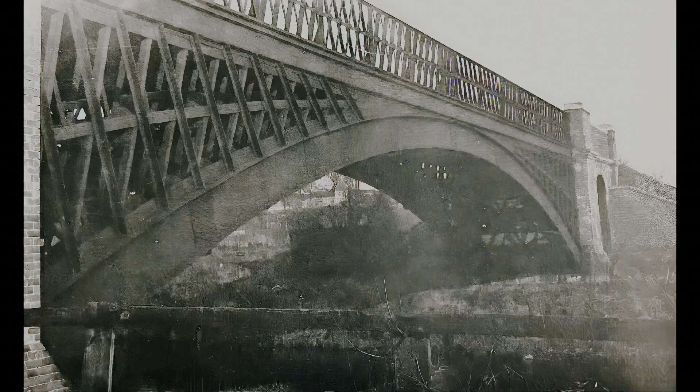This is the story of a Victorian railway bridge. I am standing on the old towpath by the River Wear at Durham City, looking across towards the cathedral and castle. Here, upstream of the city, is the racecourse on which the miners' gala big meeting has been held since Victorian times. And each June the regatta takes place along this stretch of river.

Walking further upstream, we round a bend and come across this sturdy brick structure. It is a ruined and overgrown abutment which once supported an iron railway bridge across the river. The matching abutment on the other bank is also still here, though its arch has collapsed.

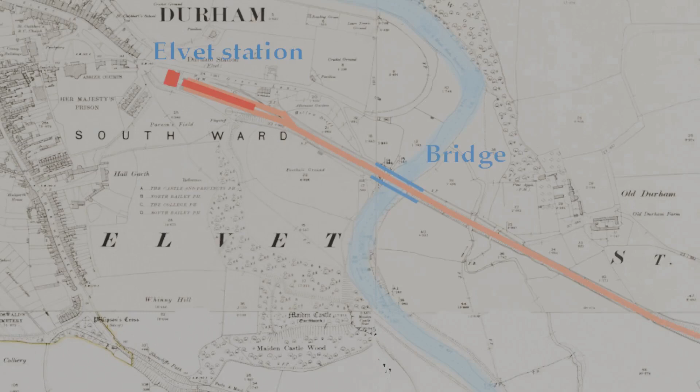The bridge was built in 1892 to carry the North Eastern Railway Company's line from Sunderland directly into Durham. This was a partial rerouting of the existing line, which passed through the colliery villages of Ryhope, Murton, Hetton, Pittington and Sherburn. The 1892 extension ended at a new railway station in the Elvet district of Durham, just behind the racecourse.

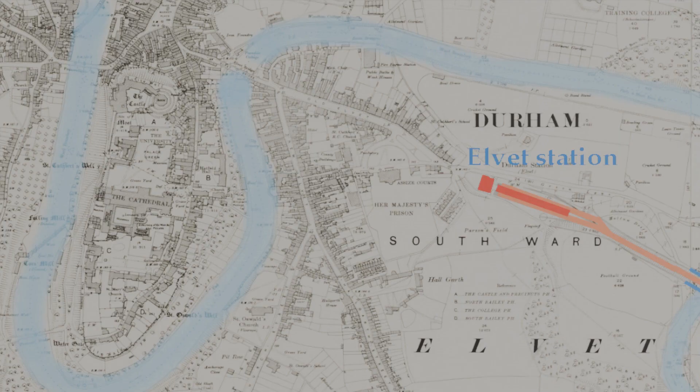The total cost of the line extension was over £30,000, of which about £4,500 was spent on the iron bridge, about £500,000 in today's money. Elvet Station opened in 1893. However, the venture was not a commercial success. It closed to passengers as early as 1931 and to freight in 1954.

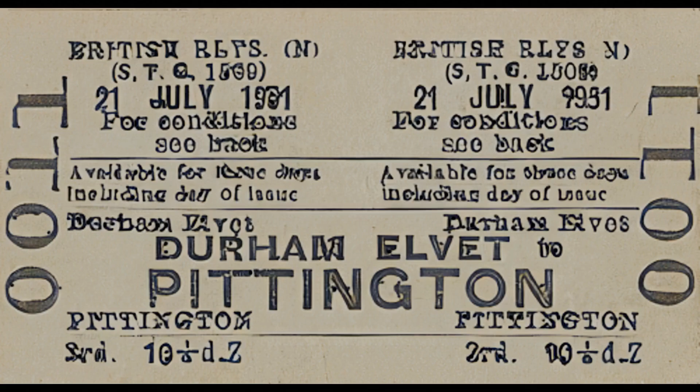The exception was once every July when special excursion trains brought miners and their families to the big meeting on the racecourse. The bridge was demolished in 1963. From my school at the top of Whinny Hill, I watched the flames of the oxyacetylene cutters as men took down the ironwork.

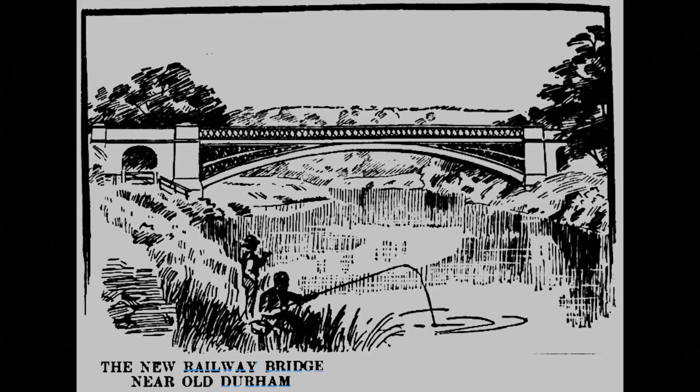In this video, we will use computer graphics to show how this impressive bridge may have been constructed and what it looked like. We are most grateful to the North Eastern Railway Association for finding in their archive the original engineering drawings. The designer was Charles Harrison.

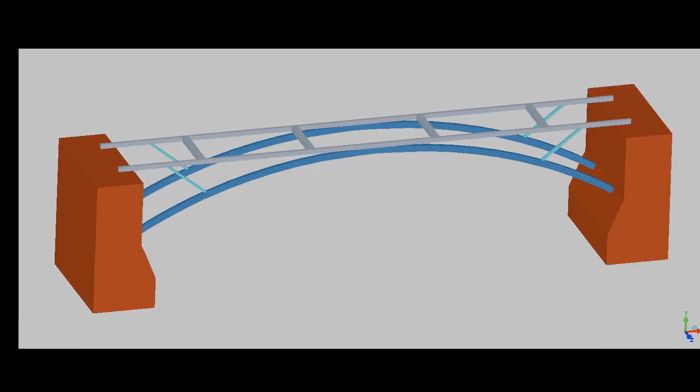The concept is simple. The railway tracks ran on a deck supported by two girders between the top of the abutments and supported below by arched girders which butt against the brickwork at a lower level. Criss-cross spars stabilise and stiffen the structure. The span was 130 feet, about 40 metres.

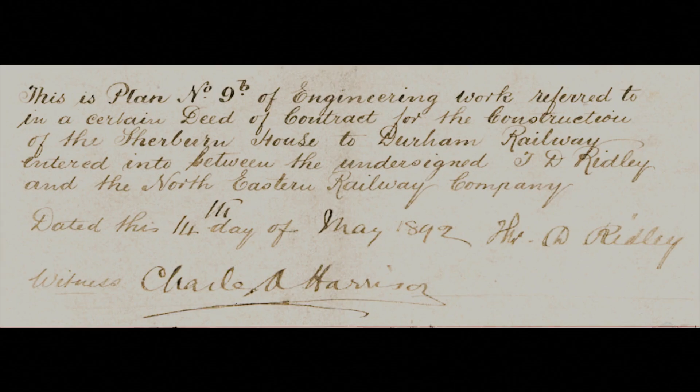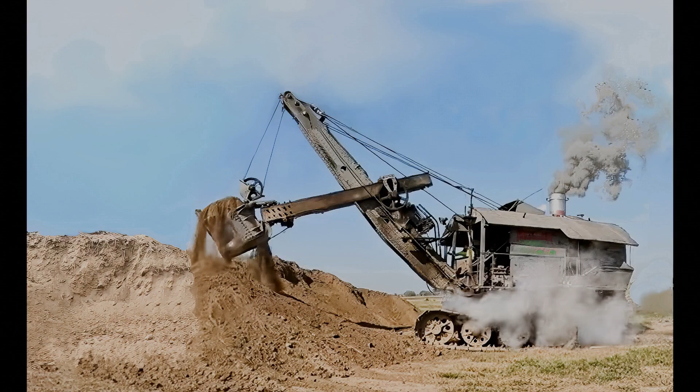We can only speculate how the bridge and station were built. It seems likely that the embankment from Sherburn House was first, so that the workmen, building materials, iron sections and steam-driven machinery could be brought in from Middlesbrough, Stockton and Sunderland.

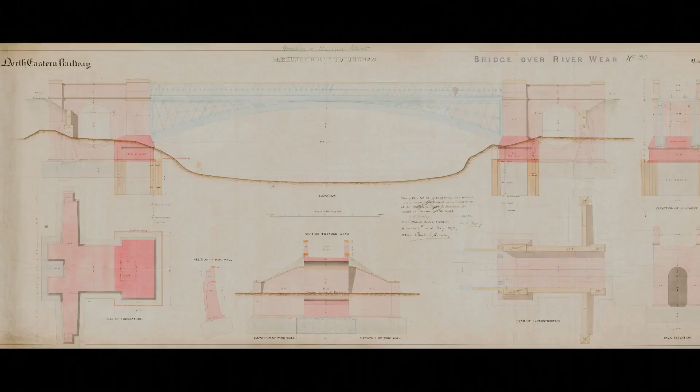Other bricks, lime, scaffolding and wooden planks may have been hauled by horse and cart, or floated upriver on a barge towed by horses. Construction was by hard manual labour. Thomas Ridley had 300 men working on the project. In the computer graphics which follow, we give some impression of how work may have proceeded week by week.

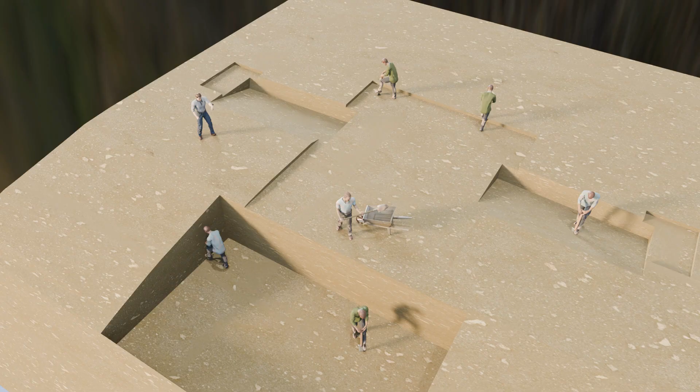Therefore, in the spirit of a model railway, here is the section of riverbank on the east side. The river level is about 10 feet below the road. That's about 3 metres. After the land had been surveyed and the vegetation cleared away, the men started digging. They may have been helped by steam-powered mechanical diggers. The soil and stones were probably moved to build up the embankment.

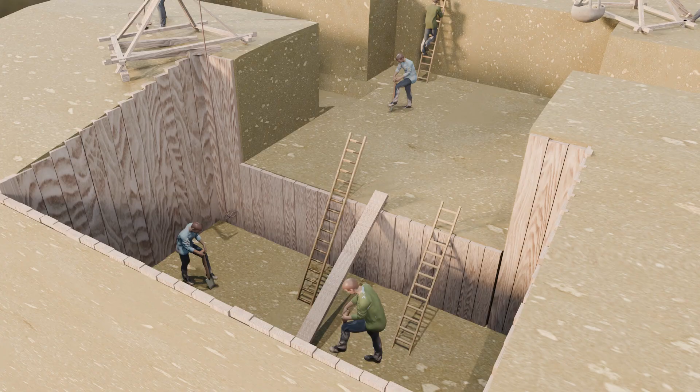A support of wooden cribbing was erected around the walls of the deepest hole beside the river. Water seeped continuously into this muddy pit, since its bottom is lower than the river bed. So while some men were digging, and others hauling the spoil to the surface, yet others were pumping out the water or bailing it in buckets.

The foundations, like the whole abutment, are in 3 parts. First, a 12 feet deep block of concrete under the massive riverside tower, which supports the ironwork. Second, there are 6 feet deep blocks under the road arch. And third are inclined blocks of concrete under each of the wing walls. In this cutaway we can see these concrete foundations.

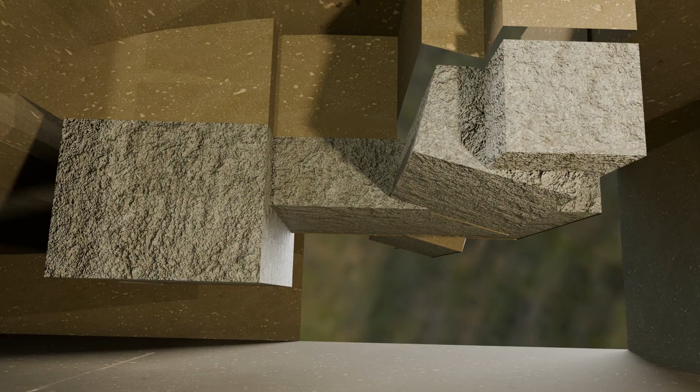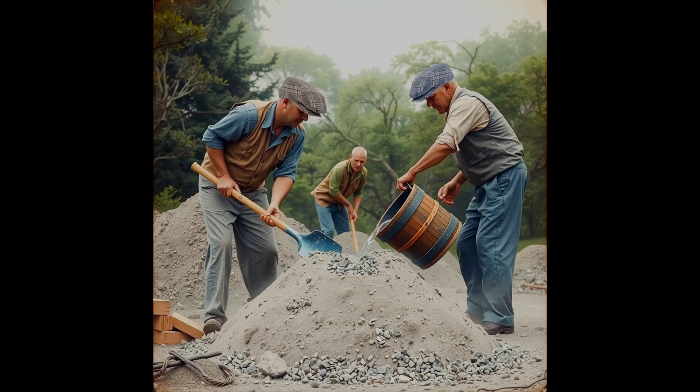Concrete is an aggregate of sand and gravel, bonded by a cement powder which sets hard when water is added to the mix. There had long been a need for water-resistant cements, and Portland cement had been invented in 1824 to meet this need. It sets by chemical reaction with the water and becomes hard in a day or so. By 1890, concrete made with such a quick-setting, water-resistant cement was the material of choice for foundations, particularly on a riverbank.

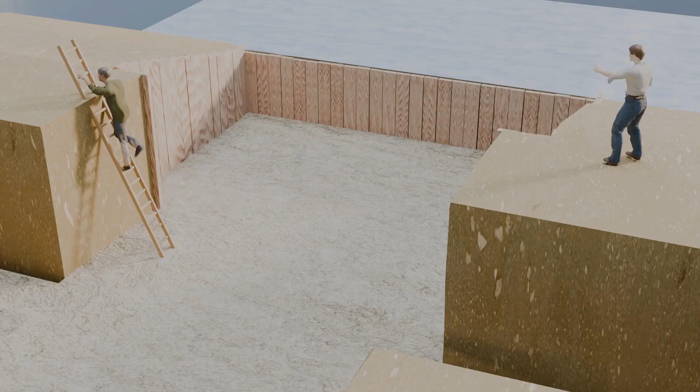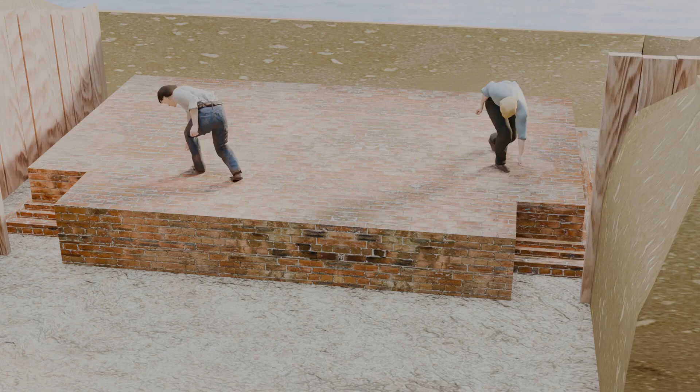Once the concrete had set, a massive block of bricks in cement was built on top of this deepest concrete block. It is 12 feet wide and 22 feet long. The drawing specifies bricks in cement to be used here. This means that the mortar should contain Portland or similar cement to make it water resistant should the river level rise high.

The wooden cribbing was sawn off and the excavations widened to allow the bricklayers more room to work. The men also laid a terraced brick base around the other concrete foundations. The positions where the arched iron girders press against the brick abutments is called the springing. The end of each girder fitted into a cast iron plate which was bolted to a massive granite block cut at an angle of 23 degrees. These blocks were set into a solid pyramid of bricks in cement.

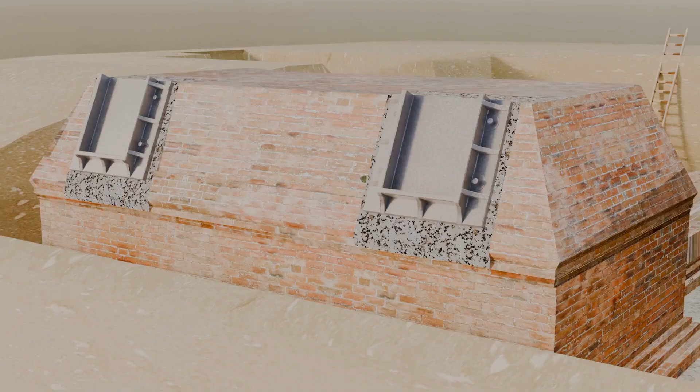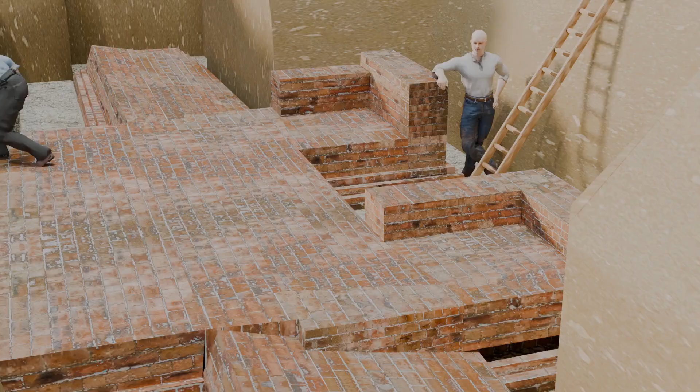Today, when the river level is low, you can still see the concrete foundations supporting the granite block, and its tapered pyramid above. One iron plate is also still in place. The higher brickwork in the riverside tower and elsewhere would have been constructed in the traditional way with interlocking courses of bricks in a lime mortar. This mortar would have been mixed in troughs on site by pouring water onto quicklime. It hardens very slowly through chemical reaction with carbon dioxide in the air.

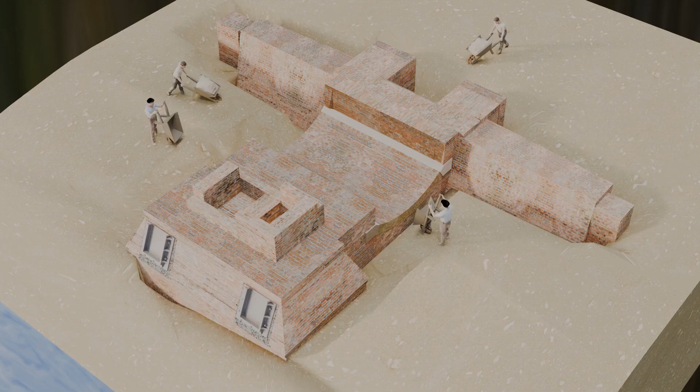Under the roadway they built an inverted brick arch, mirroring the arch over the tunnel. This would prevent the walls of the tunnel from creeping inwards under the weight of the trains. The wing walls, which held back the embankment, were 6 feet thick at their base. They were tapered in height and along their length, and each had a pillar at the end. Nothing of these pillars can be seen today. Once the brickwork was above road level, the trench was filled in.

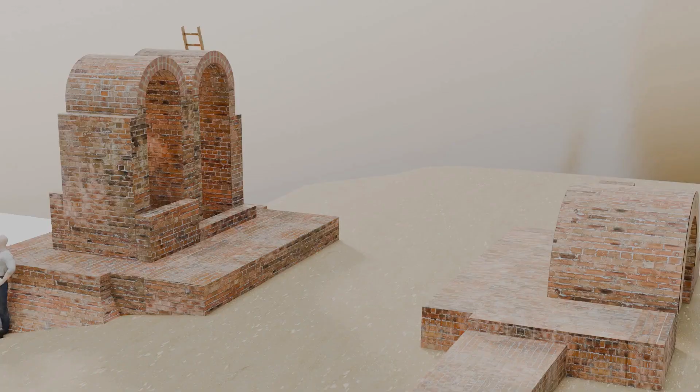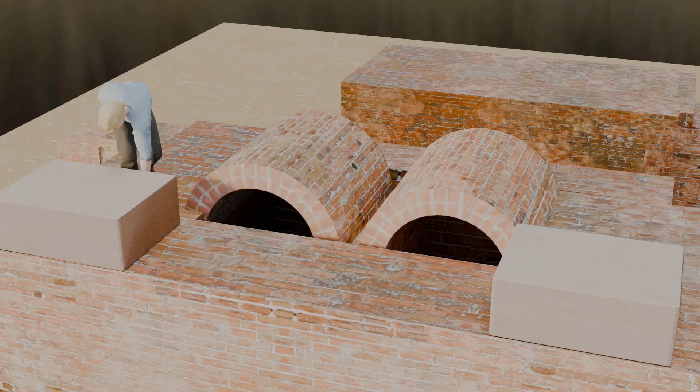There are hidden internal structures. There are 2 arched chambers inside the main tower and a single arch next to the embankment. These would be strong enough to support the moving loads above. Apart from the internal arched chambers, the whole abutment appears to be solid brickwork. There is no indication of rubble infill between walls, which had long been a common practice. Towards the top of the main tower, 2 large padstones were placed directly above the granite blocks to bear the girders of the bridge deck.

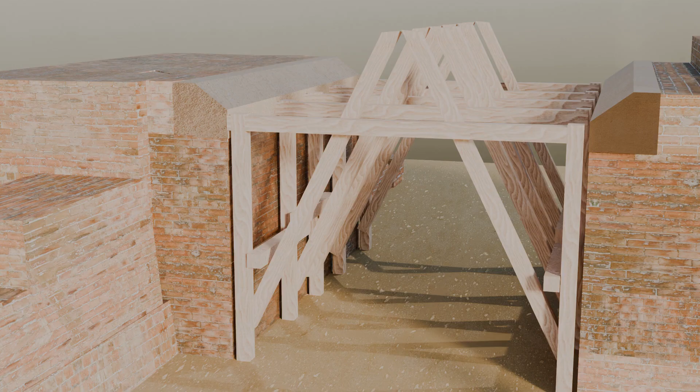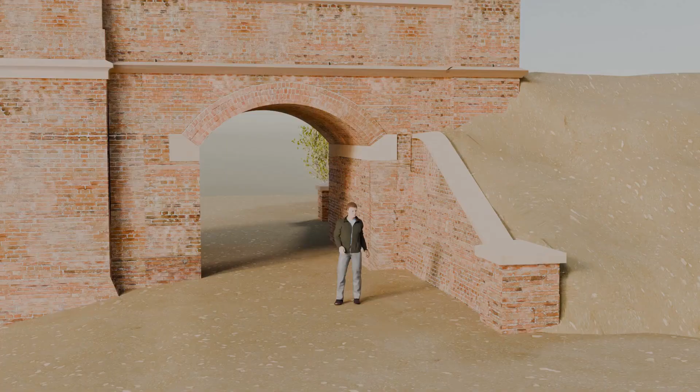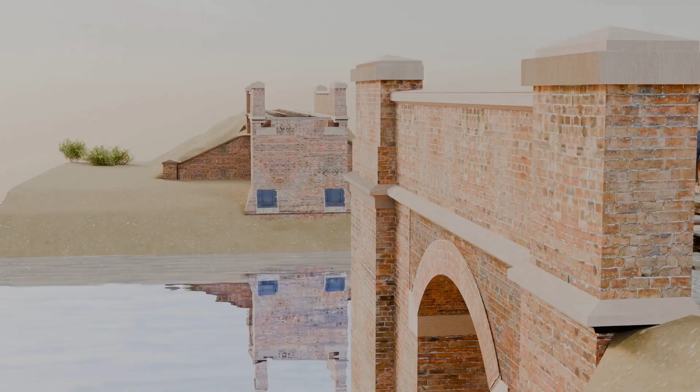A curved wooden former would have been used as temporary support while the bricklayers built the arch. The tunnel is 17 feet long, 12 feet wide and 12 feet above the roadway. The architect made the abutment pleasing to the eye by adding a stone cornice. Similar stones capped the wing walls. On top are the parapets, though they were not completed until the upper girders were in place. The rails on wooden sleepers ran centrally between them. The west abutment and the 2 embankments would have been finished at about the same time. If we imagine all the soil removed, the full size of the abutment is plain.

While the abutments and embankments were being completed, the iron girders were being forged in Stockton and preparations made on the river to erect them. The total weight of the iron was reported as 130 tons. However, there was a limit of perhaps 10 tons to the single weight which could be raised into place, so the largest girders were fabricated in sections and joined together on site. The bridge was made of wrought iron plates and angles fastened by rivets. This contrasts with the welded steel structures of today.

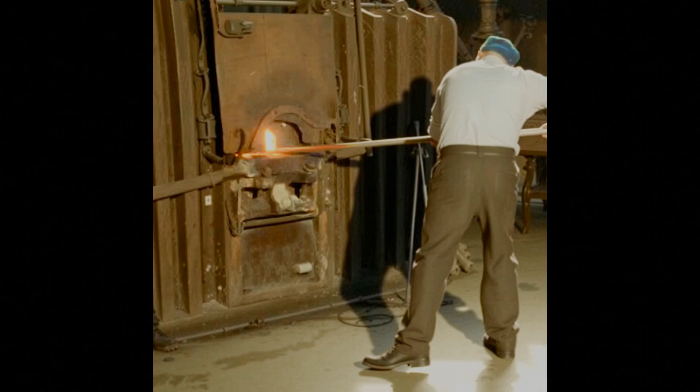Wrought iron was traditionally made from impure pig iron in a dish-shaped hearth furnace heated from above by hot gases from burning coal. The molten iron was stirred with long iron rods by burly sweating men. Added oxides and hot gases from the coal combined chemically with impurities in the iron to form a slag, so refining the iron. Most slag floated to the top and was skimmed off, but many small particles remained trapped within the melt. The iron was ready when it stuck together in pasty lumps.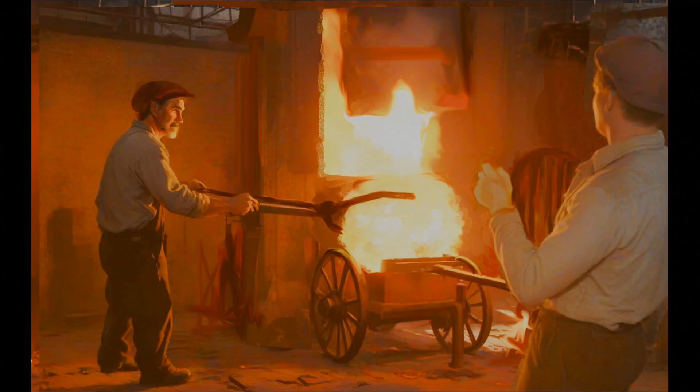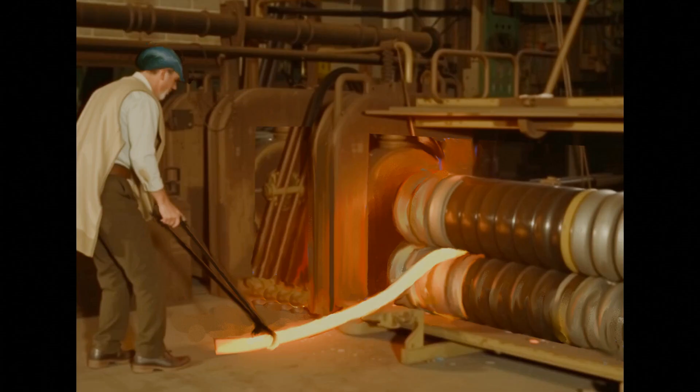When lifted from the furnace, each orange hot lump was forged into a crude block using steam-powered hammers, which squeezed out more of the slag. Several blocks were then forged together and squeezed again. Rivets and other small items were made by forging them to shape, whilst plates, bars, angled sections and rails were made in a rolling mill. The repeated forging and rolling elongated the entrapped slag particles to give the iron a fibrous texture resembling wood.

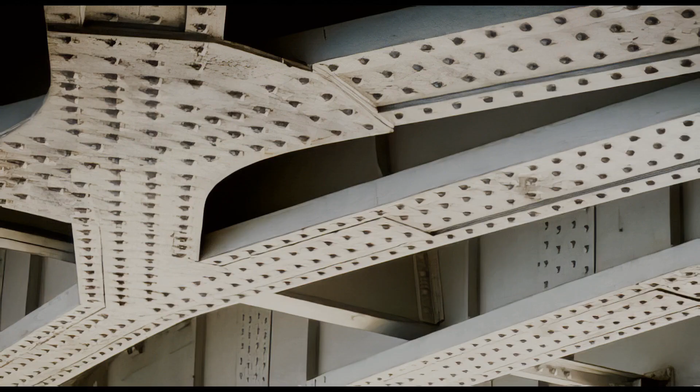Riveting was used to make iron ships as well as steam boilers and bridge girders. It was a way of stitching two flat iron sections together. Matching holes were drilled in each section. The flat sections were then overlapped and temporarily secured in position with nuts and bolts.

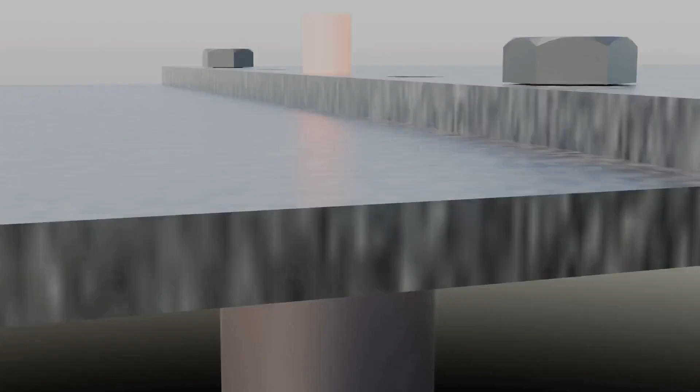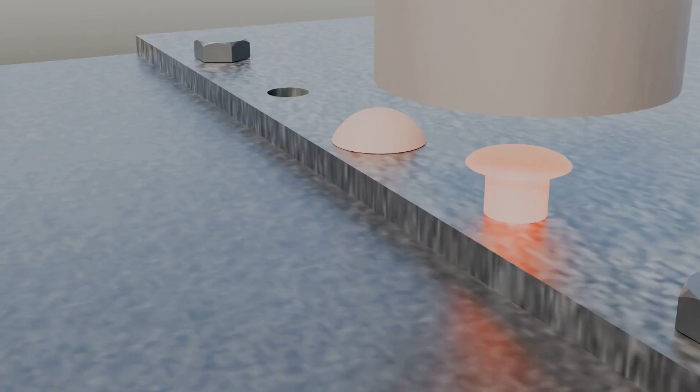A red-hot rivet was taken from the furnace and quickly pushed through one pair of aligned holes. A tool with a dish-shaped recess was used to hold the mushroom head firmly against the plate, whilst a similar tool hammered the protruding rod, deforming the softened iron into a second mushroom head. As the rivet cooled, it contracted and pulled the plates tightly together.

In the factory, rivets could be fitted quickly by one operator using a hydraulic press, but on site 2 men were needed, one to hold the rivet head, while his workmate hammered the protruding shank.

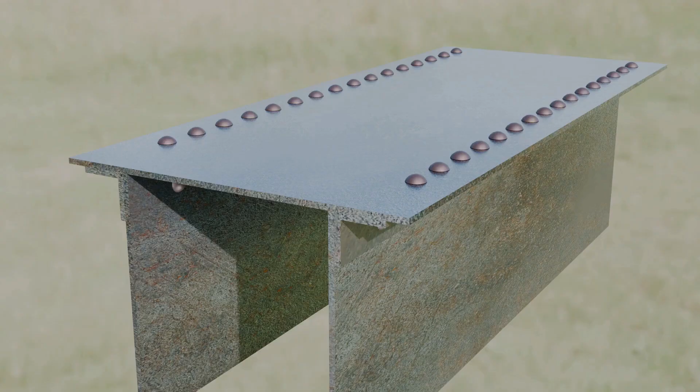Most of the bridge was made by riveting 1/2-inch thick plate and 4-inch L-shaped angle sections together. The largest girders were box-like and hollow to allow access to both ends of each rivet. Plates and sub-assemblies were joined by butting them together and adding 1 or 2 cover plates.

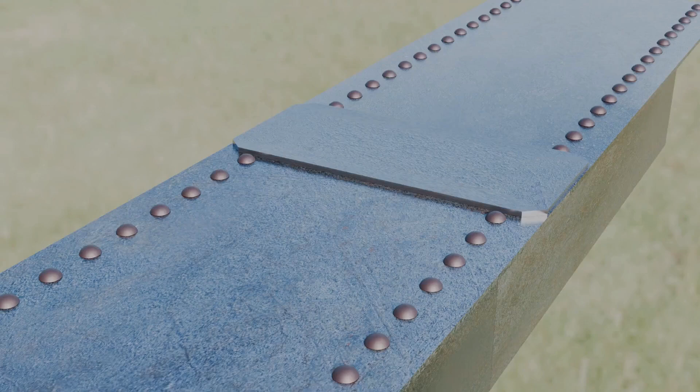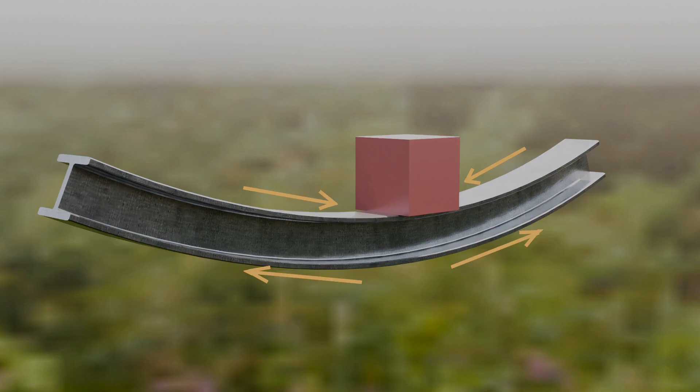A weight-bearing beam typically has 2 horizontal flanges joined by a vertical web. The beam gains its stiffness from the fact that, as it bends under the load, the top flange must contract, while the lower one must expand. The wider the separation of the flanges, the larger the effect. In fact, doubling the web height produces an 8-fold increase in stiffness.

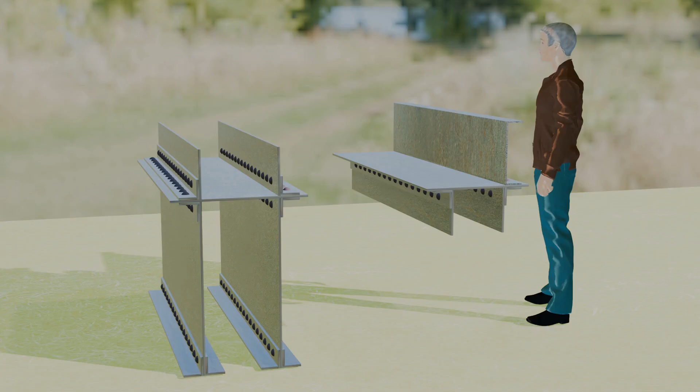These pictures illustrate the designs of the large arched girders and the smaller straight deck girders. The arched girder, called a rib, is 28 inches wide and its lower section is 36 inches high. On top are extra inner and outer webs to which the criss-cross bracing is fastened. Similarly, the deck girder has a single 14-inch high channel beam added on its outer side.

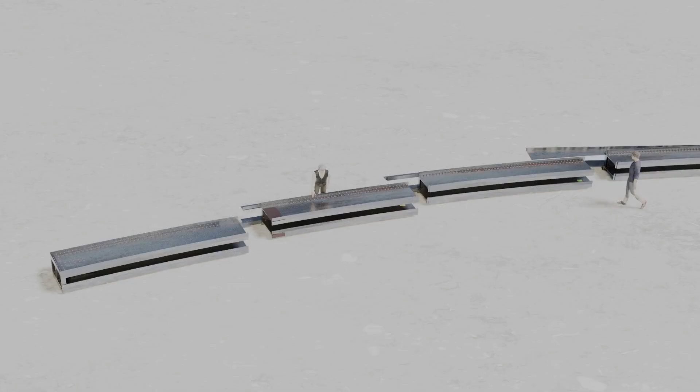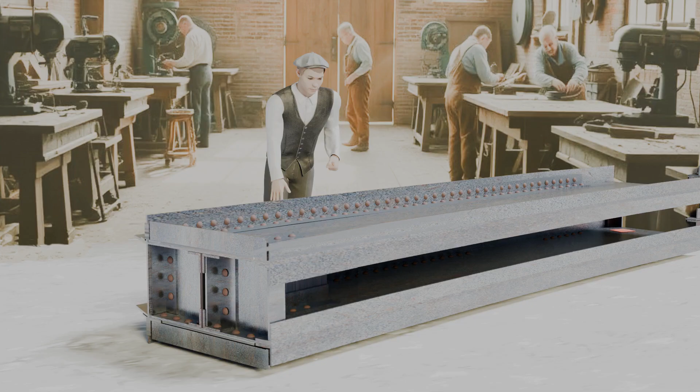Here are full sections of a rib lying on the factory floor awaiting transport to site. Note how the upper webs are offset with respect to the main body of each section. Each section was 16 feet long and weighed 2 1/4 tons. We have not shown the many holes drilled for more rivets to be added on site. The girder ends are reinforced, especially the end which presses against the iron plate on the abutment.

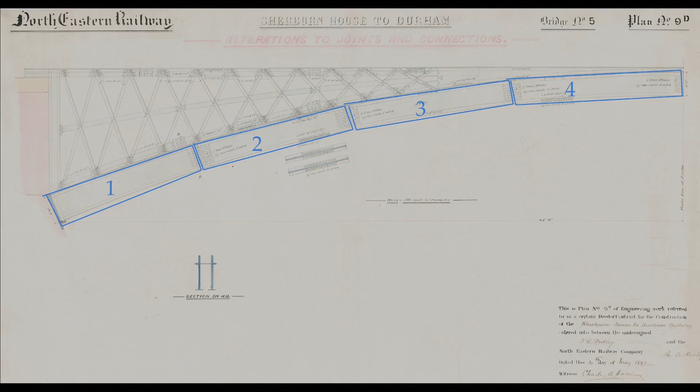The two deck girders just rested on the abutments. They were not solidly built in. Similarly, the arched girders simply rested on the iron end plates, angled at 23 degrees. These flexible joints allowed the girders to expand and contract as the temperature changed from summer to winter. However, it also meant that each girder section had to be individually supported until all of its sections had been fixed together. Only then would the whole girder become self-supporting.

The site engineer was Mr. William Mead King. By careful logistical planning, he and his colleagues determined the best order in which to bring the sections to site and how to erect them into place. We will now conjecture one way in which this could have been done.

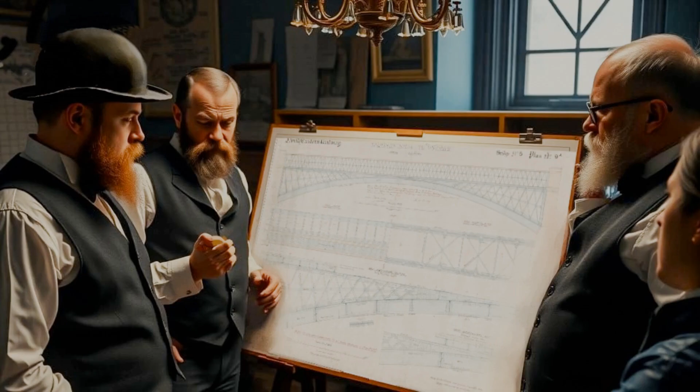We do know that a wooden bridge had been built across the river in the summer of 1892, because newspapers reported that it was bodily swept away by floods that October. So a replacement wooden platform had to be built on stout trestles driven into the riverbed. This would have been started while the bricklayers were still building the abutments.

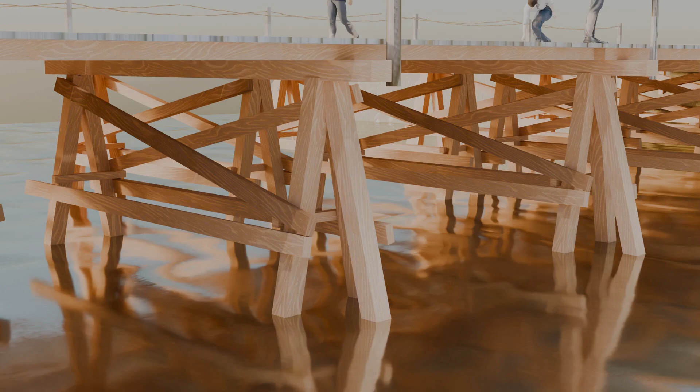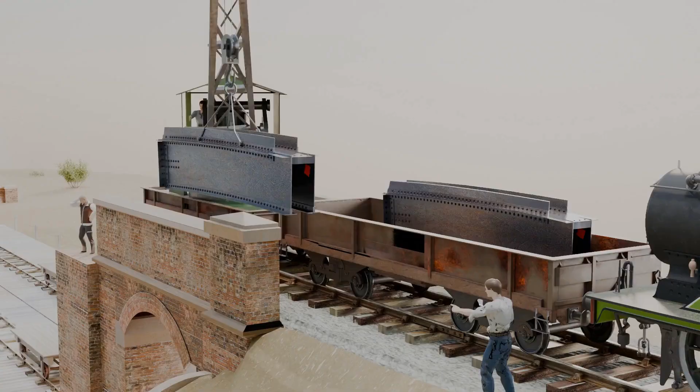We suppose that Thomas Ridley's men used a steam-powered crane mounted on a railway truck. This could lift the iron sections from a wagon onto the wooden platform. We further suppose that no similar crane could be brought to the Elvet side, but instead a steam traction engine pulled the ropes and cables. Flat trolleys on narrow rails could then carry the sections across the river.

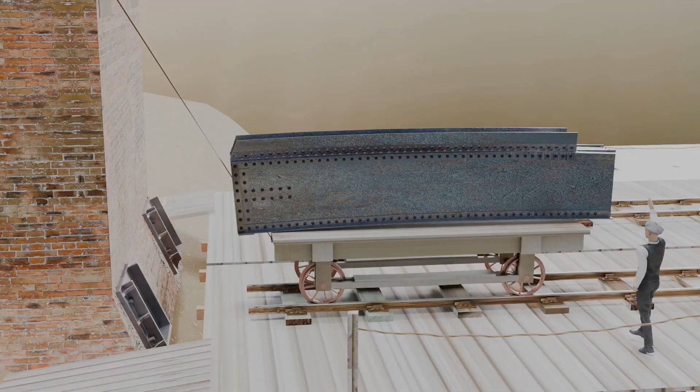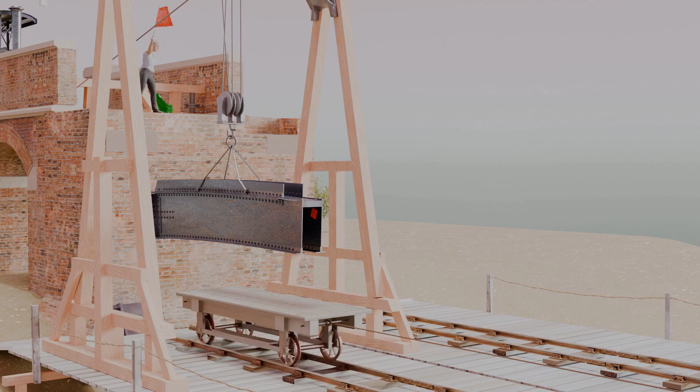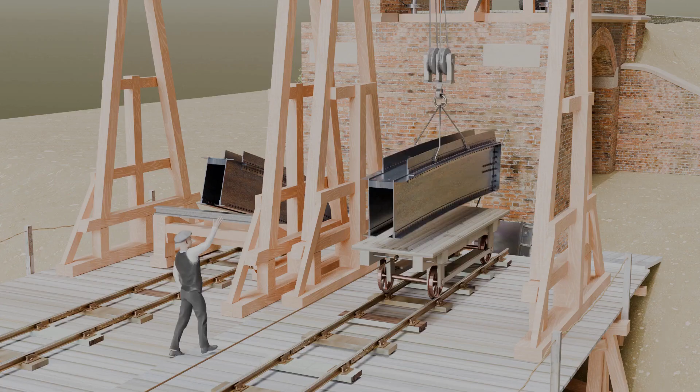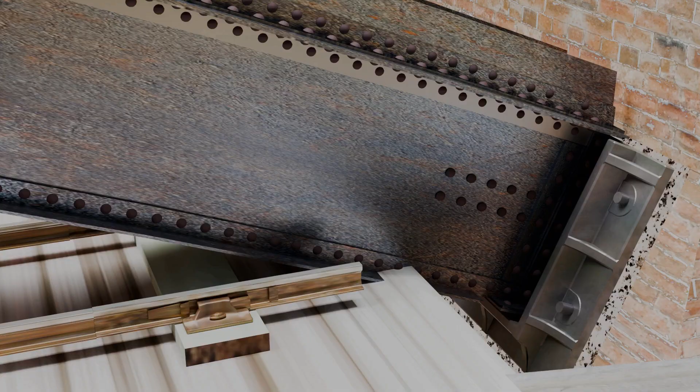Starting at the Elvet side, sections of the two ribs were manipulated into place one by one, using ropes and pulleys, and propped up on sturdy wooden frames. Their precise heights would be adjusted with hydraulic rams and wedges before they were temporarily bolted together. Some cross-bracing was also bolted on to add stability and fix their spacing.

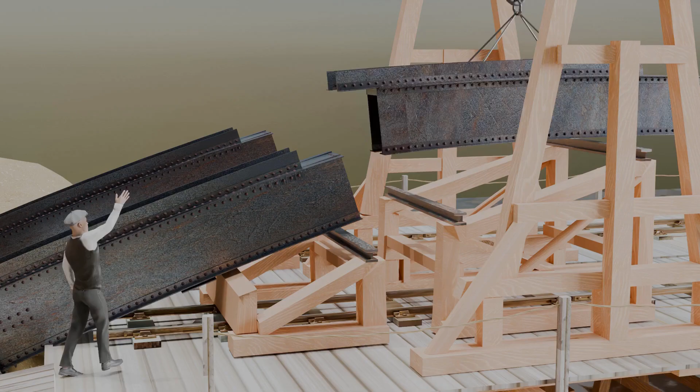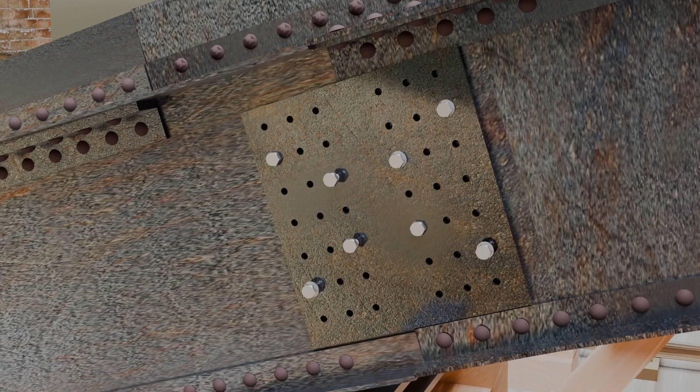Once all sections were bolted together using cover plates and bracing bars, the structure would be self-supporting and capable of bearing modest loads. The trolley rails would be removed from under each completed section in turn.

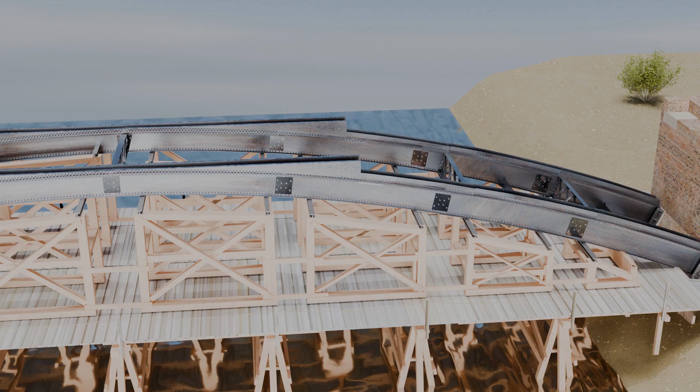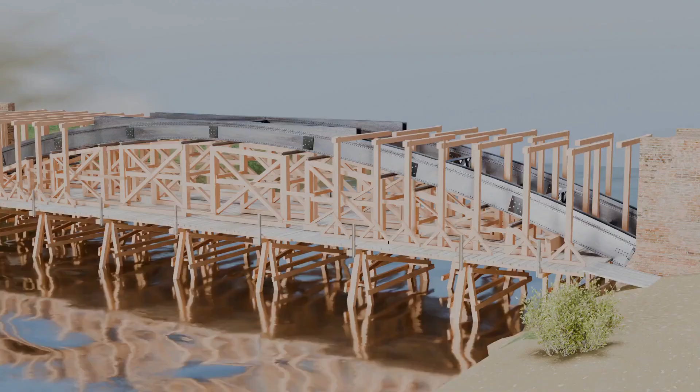In order to erect the upper deck girders, we suppose that a higher platform was built, supported on horizontal beams. Near the abutments, these could be held aloft on vertical posts positioned along the edges of the low platform. Towards the crown of the bridge, however, the geometry required that the posts stand between the ribs.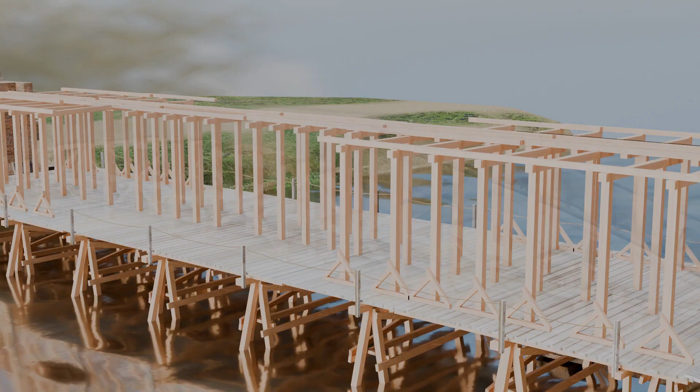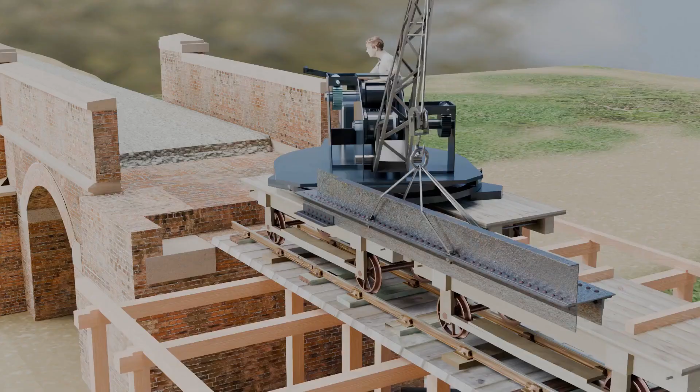If we hide the ribs and their supporting frames, we can see this forest of wooden supports more clearly. In our scenario, the two narrow trolley rails were relocated onto the higher platform. A hand-operated crane was unloaded from a railway wagon and placed to straddle two trolleys side by side. The crane operator lifted sections of the upper girders from a third trolley and lowered them into place. Each section weighed 1¼ tons.

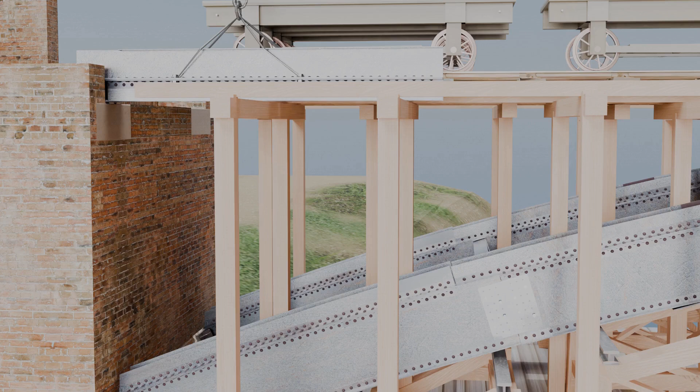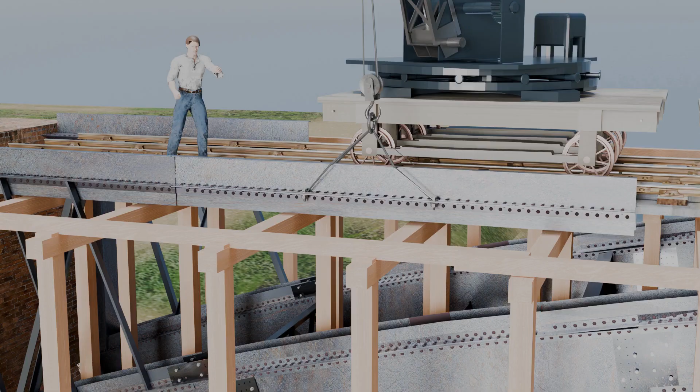These would be temporarily bolted together with cover plates and braced by several L-section bars to the ribs below, criss-crossing the triangular space called the spandrel. The teams of riveters probably started by riveting together the cover plates which join the sections of ribs. This would strengthen the ribs before all the upper girders were in place to ensure that they could take the increasing weight from above. However, it is unlikely that the upper girders were rigidly riveted until Mr. Meade King had carried out a thorough check on position and alignment.

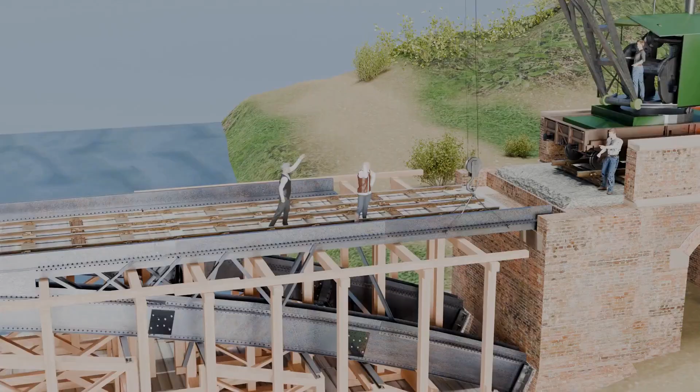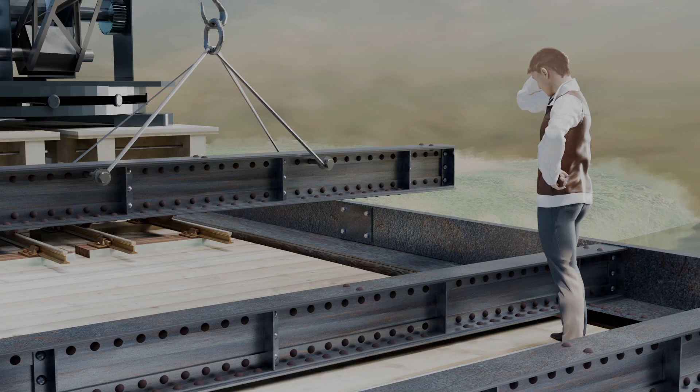The riveters would have had to have blacksmiths' forges to heat the rivets close to where they were working. The hand-operated crane would also be used to lift the transoms into place. These are the beams between the upper girders which form the deck. Each is 14 feet 6 inches long and weighs about 3/4 ton. Short sections of the trolley rails would be removed in turn to allow 2 or 3 transoms to be fitted at a time, 5 feet apart.

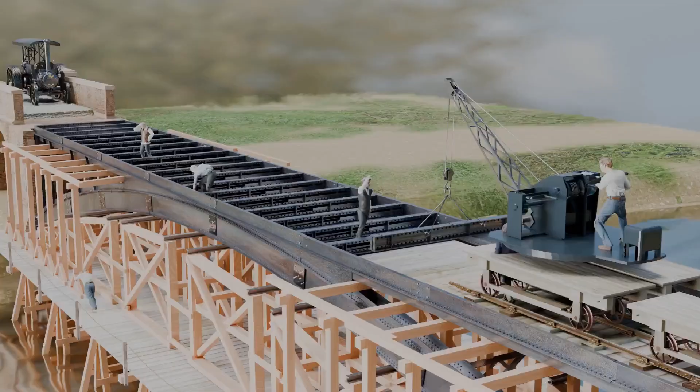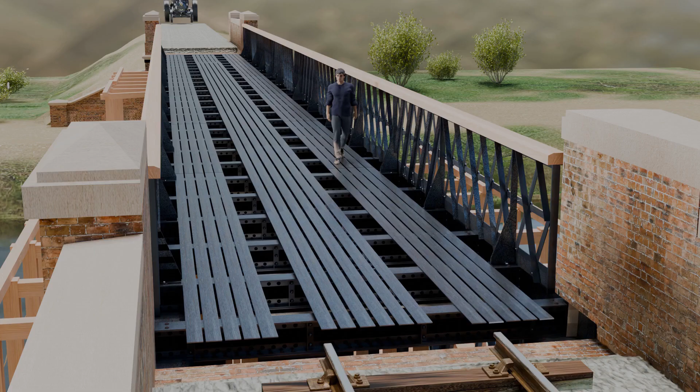The parapets of the abutments could now be completed and the railings added. To these the designer added decorative bosses. We leave you to imagine the dozens of men, the ladders and extra scaffolding during this hive of activity. The deck on top of the transoms consisted simply of strips of iron. Looking down between them, you would have been able to see the river. The mountings for the rails were squared off wooden logs bolted into iron channels.

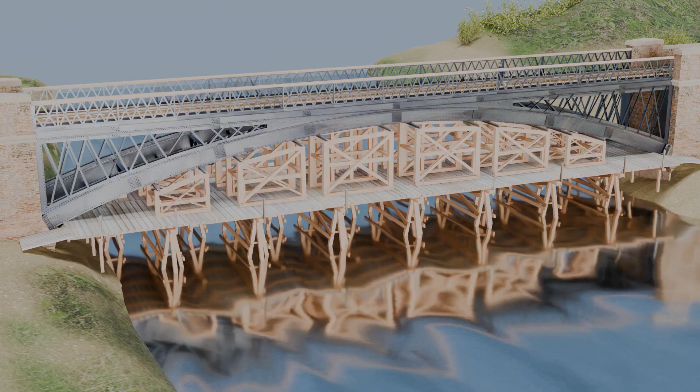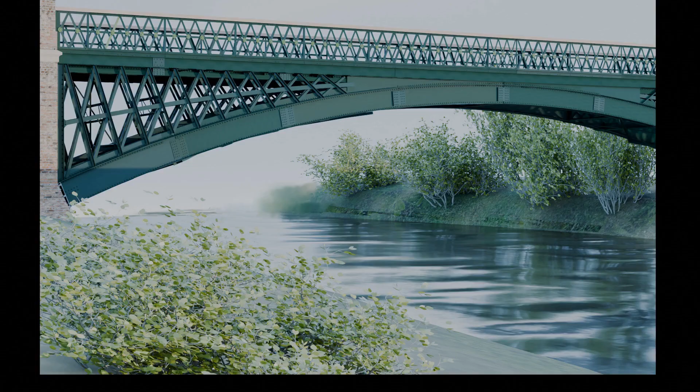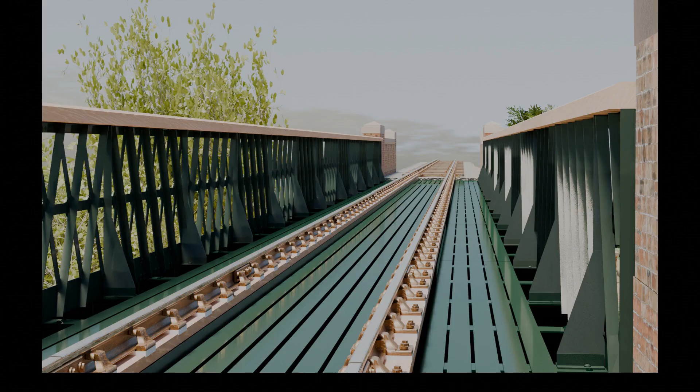Before the line could go into service, a full engineering safety assessment was legally required. This was conducted by Major General Hutchinson of the Royal Engineers on behalf of the Board of Trade. He measured the deflection of the bridge when a train moved to the middle and pronounced it satisfactorily small, no doubt to the relief of Charles Harrison the designer, William Meade King the site engineer, and Thomas Ridley the principal contractor. As one newspaper put it, skill triumphed over any difficulties.

The Mayor and Corporation of Durham City wanted a grand opening ceremony with bunting and speeches, but the North Eastern Railway Company were content just to sell the first ticket. And so the Durham Elvet to Sunderland line opened on the 24th of July 1893, ready for that year's Miners' Gala. Though only a single track had been laid, the railway company hoped for such large numbers of passengers that they had made provision for a second track by buying enough land to widen the embankment if needed. The bridge, however, could not accommodate a second track. In the event, there were relatively few rail users, and so the line closed to passengers after Christmas 1930.

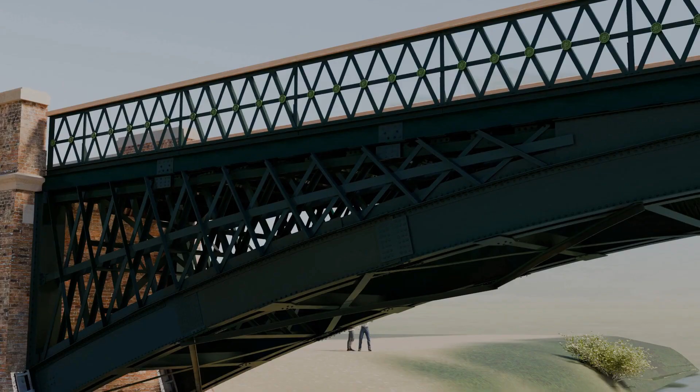When I was a boy, my father took me in a rowing boat from Brown's Boathouse in Durham almost as far as Shincliffe. Everything looked different from the river. The bridge seemed immense and eerie as we passed under its strange canopy of criss-crossed iron bars. With that reflection, we close our story and leave the bridge, Elvet Station, and the railway line through the pit villages to fade into history.